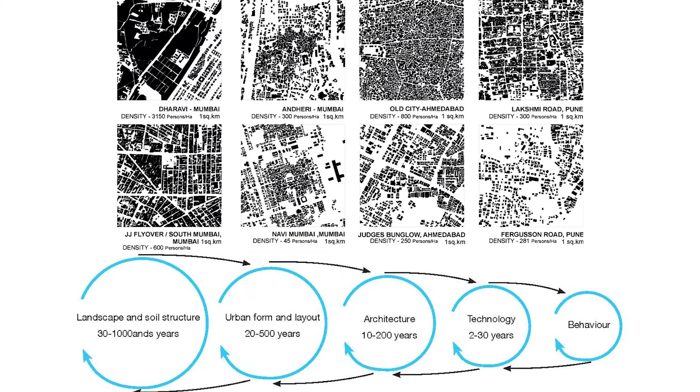So with that, I come to things which I think are important in our cities. If you see, these are like traces of any city, whether you take Mumbai, Ahmedabad, Pune. There is the old city of Ahmedabad, which is a density of 800 persons per hectare, 450 years old now. 1 square kilometer if you look at the kind of built mass and the porosity within it. Then you come to a place called Judge's Bungalow, closer to the western part of the city, and it comes down to 250 persons per hectare, and the buildings are 12 and 15 stories, yet the density is going down.

So I used to always wonder how come in 3 stories you could achieve that density which you can't out here. Yes, it's a little overcrowded, there are larger spaces, scale of spaces aren't there. But what's wrong with us? How come 3 stories and 15 stories don't match?

And then you come to Prahlad Nagar, and there's only 180 persons per hectare, and then you have these bungalows and things like that. So these are questions that have fascinated me: how cities grow, change, add. What is the typologies that you pick up? What is it that happens? And the same with Mumbai or Pune. I'm sure some of you are very familiar with that.

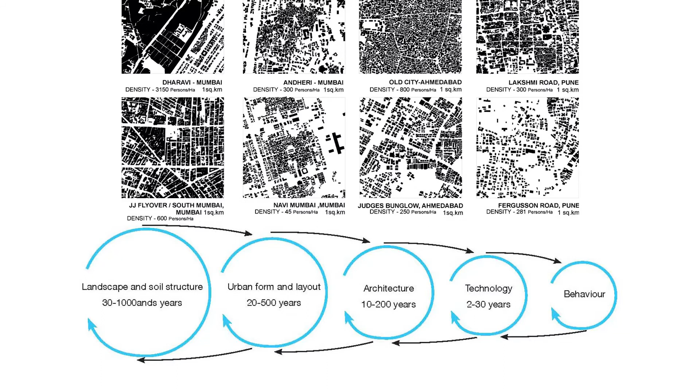The key in all of this is landscape and soil, and as Julio mentioned very importantly, water. These are issues that are connected to the ground, and those have been shaped over thousands of years. They're not something you can change easily. You have to start looking at what's beneath the ground, what's the kind of soil, what sits on top of it, how do you collect surface water, underground aquifers, etc. All of that is fixed in our lifetimes for sure.

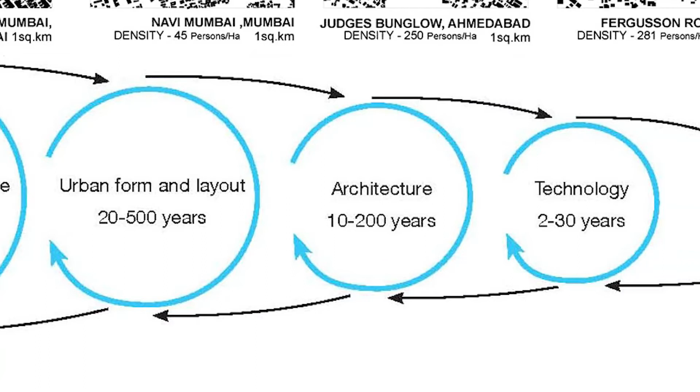You look at urban forms and layout and you say, well, that's changeable every 500 years or so. Cities will renew themselves, they will change and grow. And when you come to architecture, well, 50 years it'll change, 200 years for sure it'll change. What was 2 stories will become 6 or 8 stories, and that will keep changing depending on the land pressures or things, or the city would have moved out from there.

And then when you look at technology, like this mobile phone, every 6 months it's changing. So it's quite easy to change technology. And today when we talk about smart cities, we talk about sensors and things, it never talks about people, or whether people should be smart or dumb. It talks about sensors, and sensor technology is changing all the time, artificial intelligence is changing all the time. So that's fairly easy to change and adapt.

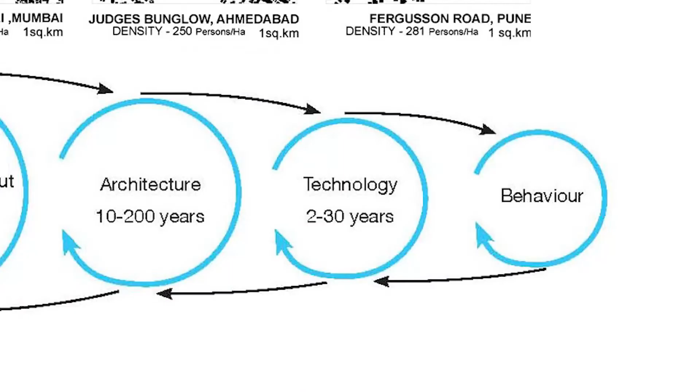And then you come to behavior. Human behavior, we are very adaptable, we adapt to any situation. That's the easiest thing to change. Our mindsets may not change, but behavior can certainly change. So I think when we start thinking about cities, we really need to start looking at what has to be guaranteed for generations to come, what has to be done for the next couple of 50 years or 100 years, and then come down to what can be easily changed, and as we go along, we'll change those.

I'm going to give you 2 examples from the city of Ahmedabad, because I live in Ahmedabad and I'm engaged with the city. It's one of the fastest growing cities in the world. That's a growing city. But what happens when you come to growth?

We have reached in just 10 years from 6.4 to 8.8 million, and by 2031, we're expecting 10.8 million. So, on one side that looks very exciting. You have pollution - it's terrible if you look at it. You have flooding - cities that earlier didn't flood, now flood. You have issues of parking, issues of exclusion, and most importantly, living quality. That's basically what one starts looking at.

Several years ago, one of my thesis students did a thesis on a mechanism we have called the town planning scheme, or land pooling, as it's commonly called, in Gujarat. It's very successful. As the city grows and more villages come into the fold, people, instead of paying cash for infrastructure, have to surrender 40% of their land. It started with 25%, now it's gone to 40%, and 60% of the land is retained with them in their original plot. That 40% is used for infrastructure - roads, hospitals, schools, some for sale, for making money, for paying for all of these things. It's an accepted mechanism because there's no money exchange.

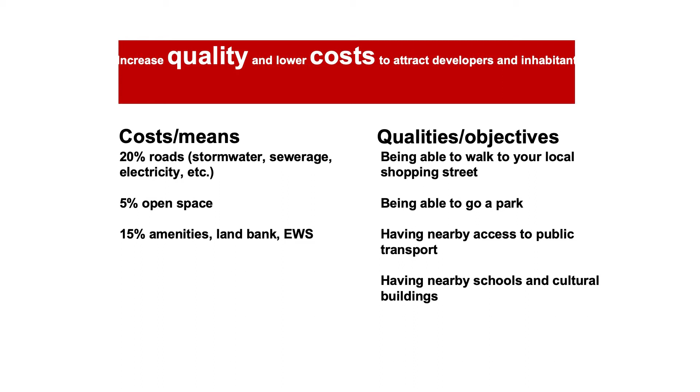What we started looking at was not the cost and means, but the qualities and objectives we wanted to achieve, which was being able to walk to your local shopping street, being able to go to a park, having nearby access to public transport, having nearby schools and cultural buildings. This became the basis of looking at how villages were incorporated. So this is Ahmedabad in the center.

Now, when you start looking at this land, you see that village life centers around the pond. None of these are natural ponds; they're all man-made. For agriculture, you need water. You look at the slopes of the land, you make bunds out there. And as Julio mentioned in the morning, fields give you clues to how water is percolated in, collected together, and used as a collective effort.

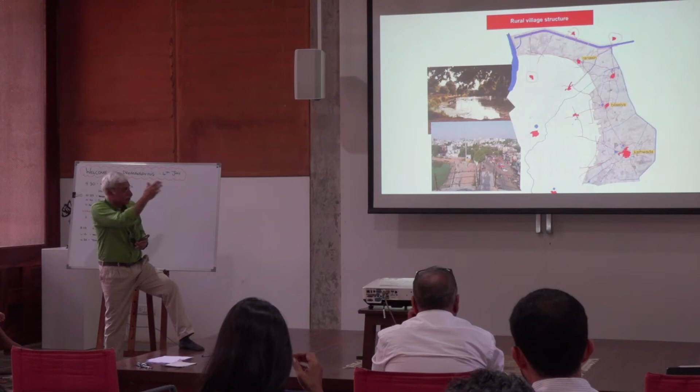And there are also then the public spaces that arise naturally out here, whereas the village chopal sits out there, the banyan tree and the water body—these are all interconnected.

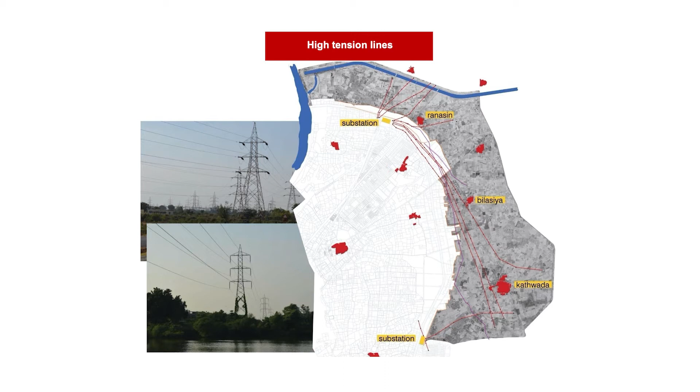Another thing you find is this ubiquitous high-tension lines that cut through our landscape. And when you start looking at them, you can't build under there, but you can use them for open spaces and connections.

And then you look at irrigation canals, lakes, local water bodies, and these are also part of the landscape. If you start looking at them as assets rather than as something to be discarded, then I think you save a lot on infrastructure.

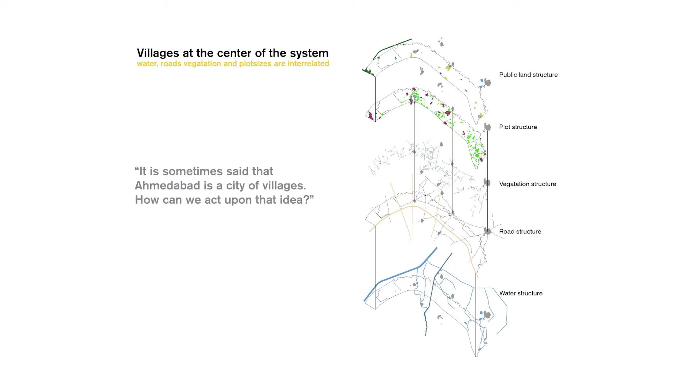So what we started looking at was public land structure—the plot structure, the vegetation structure, the road structure, and the water structure—as layers which connect together one on top of the other. The moment you put them together, you get a plan.

And that starts changing from rural plot structures—very interestingly, and I'll come to the next project—where we found about 1 hectare to about 1 acre or so is the largest, most common rural land holding.

If you look at this and start looking at the urban block, a sensible urban block is about that size. Not only that, but the trees planted on the embankments then become part of your road structure and the side trees for this.

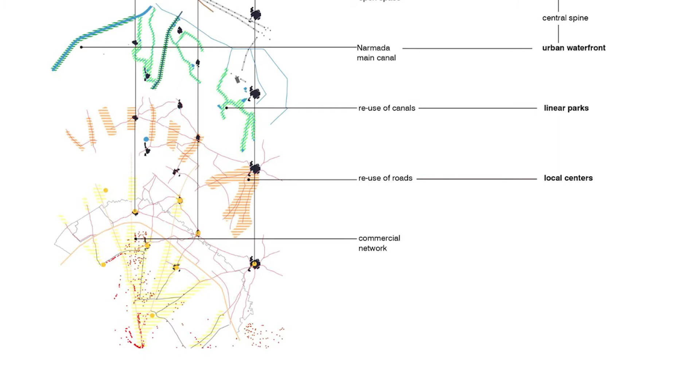So you can combine all of this, and all of this can be used—the canals can be used, the Narmada main canal that passes by, mandatory open spaces can be under those high tension lines till they disappear. And the reuse of existing routes and roads can all be made together to connect up this new structure that's coming into place, rather than as something added fresh.

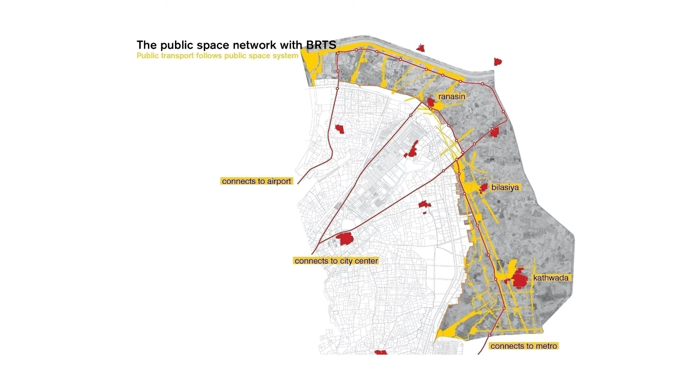So that's this thing, and you can see the yellows—that's all the connections. Ultimately, cities are about connections—connections between your movement and pleasant spaces, through public spaces, through places where you can gather, from places next to water bodies, to trees, etc.

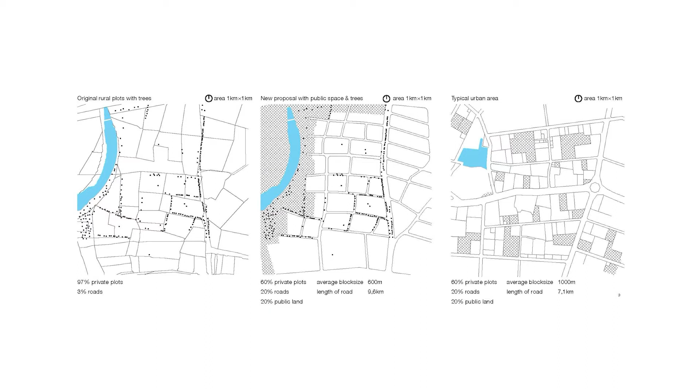Now, this drawing shows you what the town planning scheme generally does. It has one major arterial road, then very small little things, and then little plots of open spaces dispersed in between, because there's a certain percentage of open space you have to work with.

Instead of that, if you concentrate along the water body and put all your open spaces around that, and then use all the plot divisions as they are here to make these roads with the trees, then you've preserved that whole thing, and you've got urban blocks of a certain size and scale that work with the city. And then, as I told you about the relationship, we mapped all the villages in the surrounding areas and their relationship to water and to the public space in between, which was the critical thing as such.

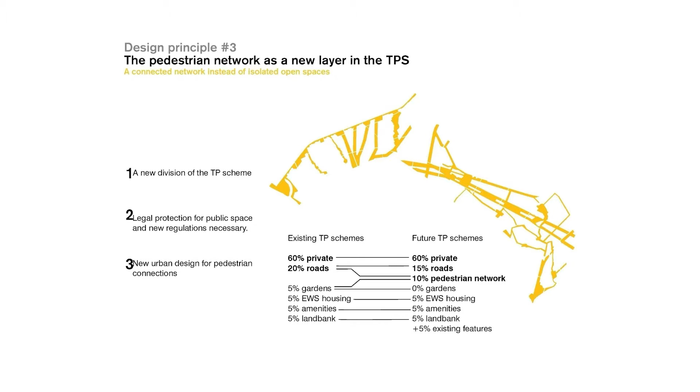From what we came to was that 20% used for roads, we said 15% is actually roads. Even though the total connectivity will increase, the percentage of roads will actually decrease in the land you use. Your pedestrian network and gardens become part of that, so you have linear parks, linear connections, connecting everything together, while all other things remain the same. The municipal authorities said yes, this is a great idea, because they weren't losing any revenues, and they were actually saving on infrastructure.

That's how the plan emerged. And actually you see that the field layouts are very much like urban blocks, not very different from that.

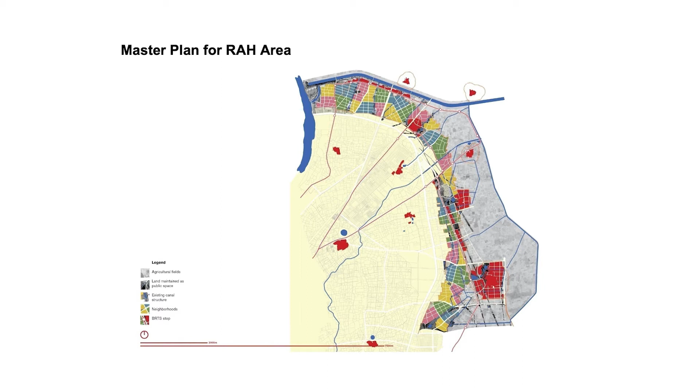Then some visualization of how canals could be reused, public spaces, the streets connecting to them, could be connected together. The larger open spaces would have the taller buildings, and the rest would take their time to grow. So you get a definition of a city starting from public spaces and streets connecting up, and slowly the land fills up, because it's not going to happen in 2 or 5 years, it's going to take 50 years.

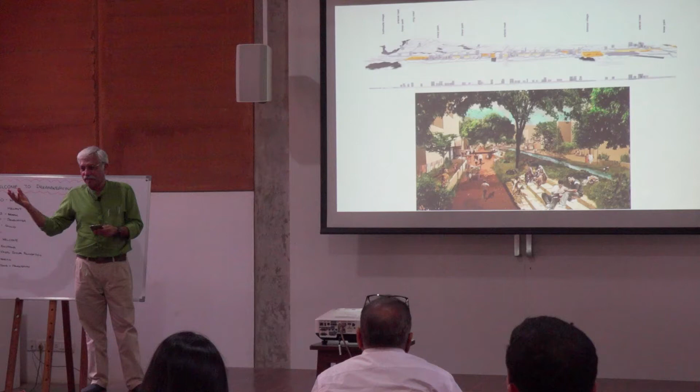The other project I wanted to quickly go over is this stretch you see from east to west, if north is up. There's an 18-kilometer long metro line that is almost complete now in Ahmedabad. In fact, it passes in front of our office. Huge infrastructure that's coming up.

Now the question is that we are very good at putting up metro lines, large projects like this. Every city thinks this is the flavor of the season, and they want metro lines. Whether it connects up anything or not is a different matter. Secondly, most importantly, as we discovered, the last mile connectivity is key for any such project to be a success. If you can't walk to the metro line, then I think you lost the game.

You'll have this metro running empty, not making any money at all, and slowly they'll say this is not successful. You'll also find that if it takes more than, say, 400 to 600 meters of walking distance, people won't walk. If they have to take their scooter, find parking, and then take the metro, it's not going to work. They'll just drive the 6 kilometers they would have gone in the metro.

So we said here's a chance to subvert the system to make a pedestrian-friendly city. Ahmedabad has hardly any sidewalks, and we said here's a chance to make large sidewalks, allow last mile connectivity, and break through the housing societies that they were. So I'll give you an example, this is just in front, close to our office.

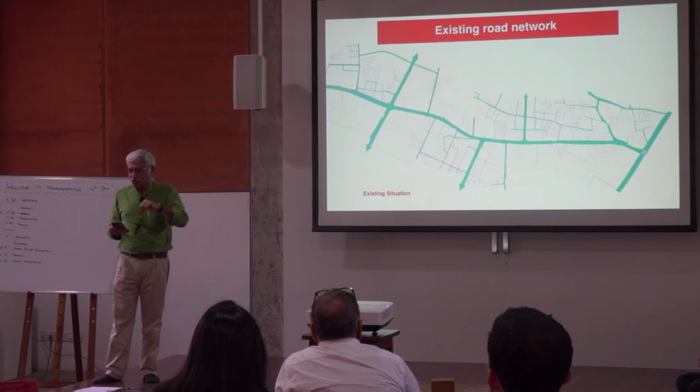They said, okay, here's a large parcel, then they'd give it to developers to develop it, and you'd get gated societies. What we found very interesting was that people would break the compound walls to take a shortcut, and some of them had started allowing that. So we said, why don't we use that as a method and start looking at margins?

We waste about 28 to 34% of our land locked up in margins in buildings in our cities, and it is completely useless. If you start quantifying it in terms of money, I think it's a huge amount. There was recently a report in the Times of India for Ahmedabad, a CEPT study done that showed how much land you're wasting in your cities.

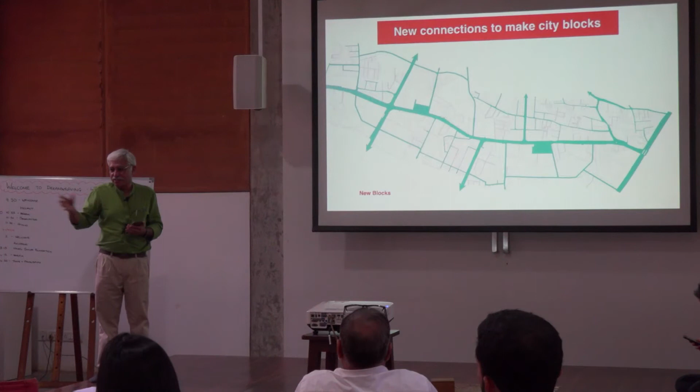That's why I come back to what I showed you in the beginning, which was that the density in the old city is so much higher, still being 3 floors, whereas in the new city, it's all locked up into these margins. So we started looking at that and the common plots.

We started discovering so many ways you could take private and public lands, connect them together, and have shortcuts making this. Now you start getting the sense of an urban block within that, and then in those places you start putting in public utilities, public amenities, to connect the city. From that emerges concentrations of public spaces with large housing, this remaining untouched. It will change as it changes.

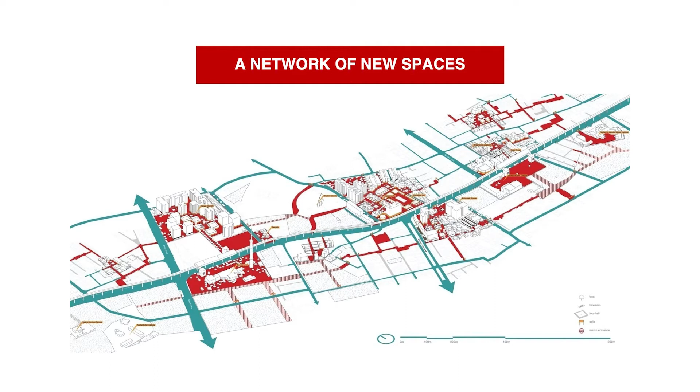So the whole point was how do you carve out of what exists and see very carefully what you can install inside that to make it public friendly and more porous and permeable.

Now I'll come to a competition that we took part in, which we never won. Richard Rogers, who passed away recently, was one of our competitors, along with Fumihiko Maki and us, participating in this Amaravati project. We put a lot of the ideas we were talking about into this, and I thought I should share this with you.

It was part of a larger master plan of about 217 square kilometers, and we were asked to work on the capital complex of 4 square kilometers within that. That's just about a little short of your city area, which is about 4.9 square kilometers, and this was about 4.

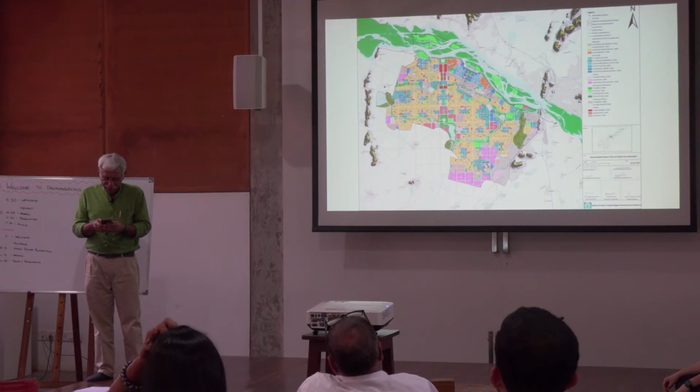You see that little strip stretching from this major highway coming in here to the Krishna River on the other side. The Krishna River floods, so there's a huge bund, so actually you have no access to the river. There's a huge bund that cuts it off.

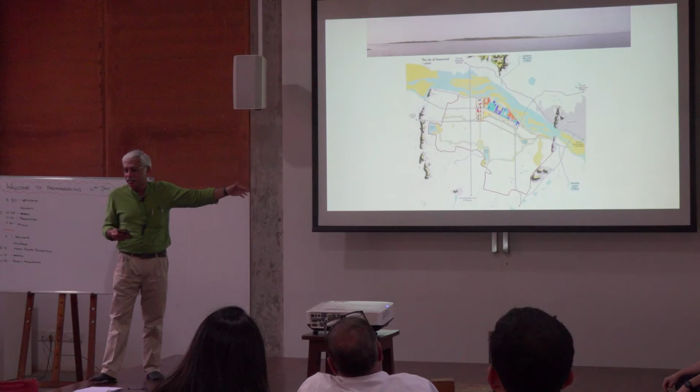So the challenge was, how do you connect to the river without allowing the flooding? In fact, you have another problem from the hills—the water flows in towards the center and then comes out, and you have to discharge that water. So there were conflicts in the ways the topography worked. That's the Krishna River on top—you can see how large it is.

So we looked at three things: the sacred, the land, and the people. The sacred, I think, is important to anchor people to where they belong. The land tells you about the topography, the soils, the species of things that grow on it and that thrive on it—it's mostly agricultural land. And then, of course, the people and their culture.

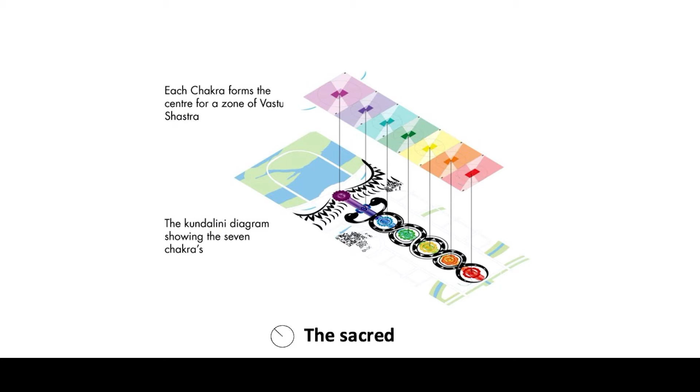So we looked at these three things and asked, how do we represent that in a plan? For the sacred, if you look at this stretch of land, we used a diagram like a Kundalini diagram showing the 7 chakras, dividing up the spaces. Each of these formed a Vastu zone, because this is Telangana, Andhra Pradesh, and Vastu is very important.

So it was part of the brief. We'll come to the question of how much I actually believe in that later on. But we did this zoning, and we had a Vastu person as part of our team to do this.

From that, the idea was that the principal buildings—there were three: the Secretariat, the Assembly, and the High Court—formed the entire complex. Then there was housing in between, and government offices. This was essentially a government sector as such, and those would stretch in between.

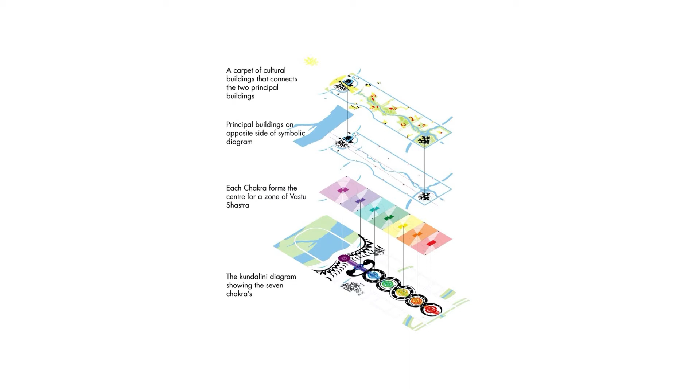A carpet of cultural buildings were interspersed in between, connecting these two principal anchors. These were various kinds of museums, art galleries, etc., that came up. So this was the sacred part.

Then there were all these existing bunds, and sight lines, and connections through that—canals running through—and we said, how do we incorporate that? We started connecting existing trees and plantation on site. I know it's not very clear, but bear with me.

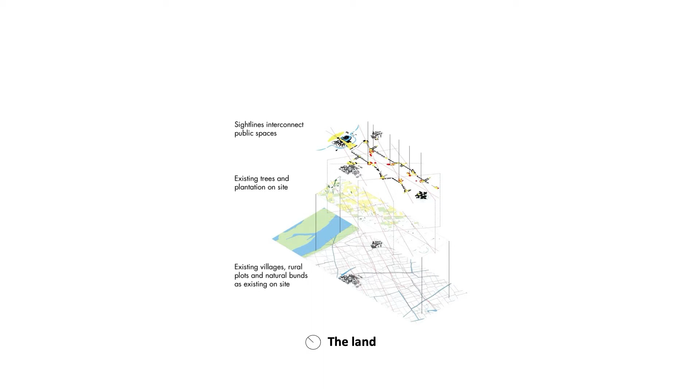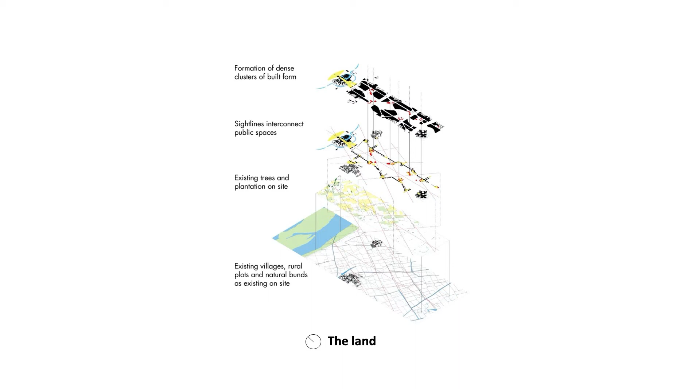These public spaces that we interspersed were connected through various sight lines and shortcuts, making a crisscross pattern of connections. Around those, anchored around that, were dense clusters of built form surrounding each one. Then they were made more porous to get the kind of numbers we were looking at to fit into this—that was the usage of the land.

The third part, the people, involved 6 clusters—there were 2 villages adjoining us, and 6 clusters of local schools and facilities, which were again where these cultural buildings were happening. They were clustered around that so they would be useful not only during certain specific hours but could be used 24/7 by other facilities also, with residential programs so each one had easy walking access within 5 minutes to any of these facilities.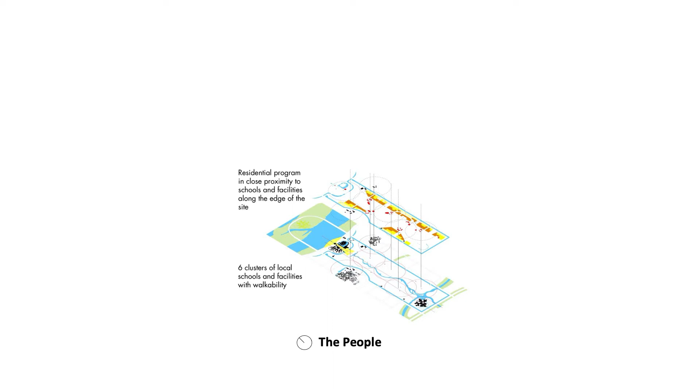Office programs faced the central open spaces, mostly government offices, with a system of interlinking bazaar streets tying the whole thing together. Then there was an inside public bus loop interlinked with the bazaars, the streets, and the public nodes, as well as water-based movement through that, etc. So this is what really formed the basis of the plan.

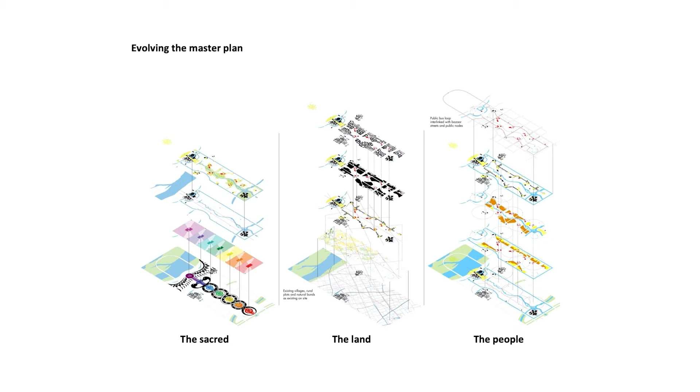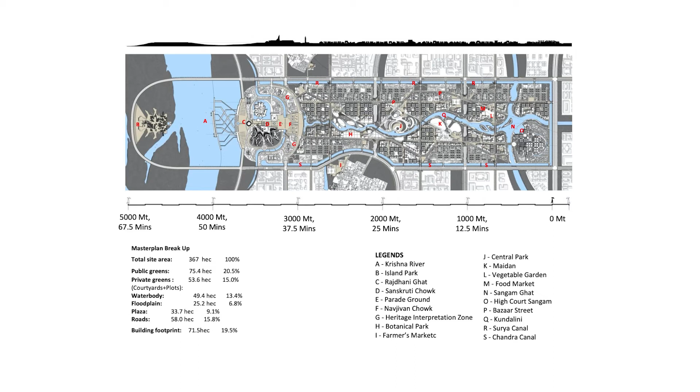And that's how the plan sort of emerged, that connecting to the Krishna River, the main public spaces, the main things for the assembly and the secretariat on one side, and the high court on the other side, and the office spaces and housing areas connected in between.

Now, what were our concerns when we were looking at this? One was health and safety, movement efficiency. We all know that people walking is the most efficient form of non-polluting transport, then cycles, public transport, and last and least is cars.

And of course, pollution, because the moment you take away this traffic, pollution levels start coming down. And the other one was mixed use. So how do you reduce walking distances? How do you make inclusive societies, with flexible infill and engaging a program.

And so if you see the standards for each of these, whether they're cultural buildings - that's the red one - standards for walkability. What we achieved in Amaravati was far more efficient in terms of walkability, much closer, densely packed.

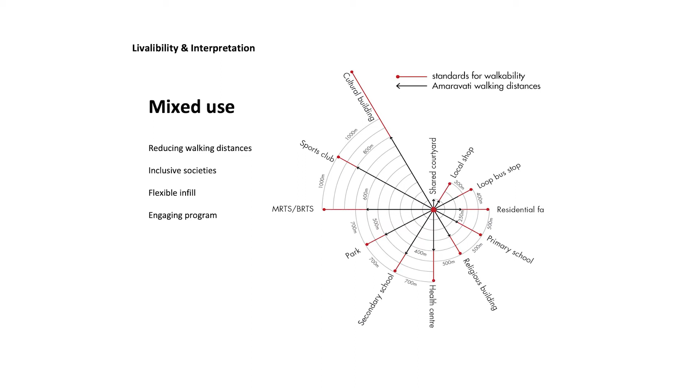And so the built form came together like this, that through your bazaar street, which is this part of it, you have offices, cultural buildings, dense housing, and then slowly more private bungalows. As you went to the periphery, the bungalows came in.

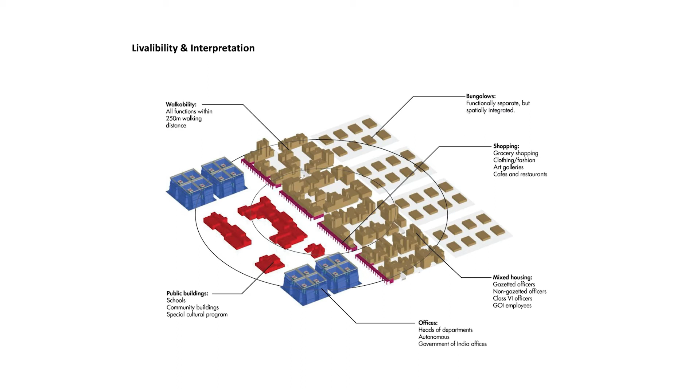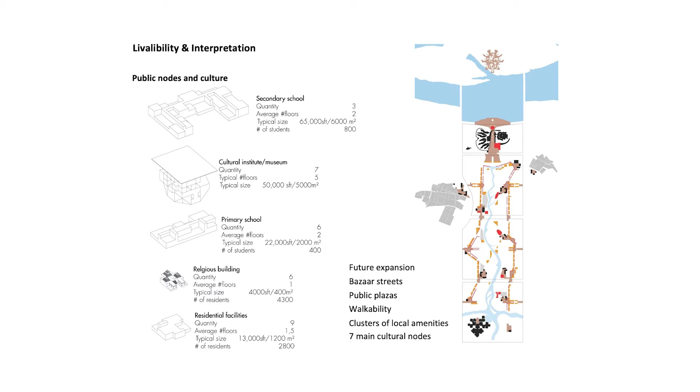So public nodes and culture, as I mentioned, cluster of local amenities along with that, 5 minutes walking distance, public plazas connecting them, bazaar streets connecting it, and then of course future expansion within that.

Walkable cities meant confining cars, active street life, defined streets and urban spaces, generous sidewalks, limiting building heights, and pleasant microclimate. These were the criteria that we put up.

The question of thinking about density - very often that's the model one in the center. If you took a look at FSI2, you need that much parking and you get a tower, and you get this sort of island around the thing of cars. If you look at setbacks, then you're still covered with cars.

And what we were looking at is mixed use and parking all happening underground. Now, we are not talking about a completely car-free city, but we try to confine cars to a certain area, and I'll show you in this.

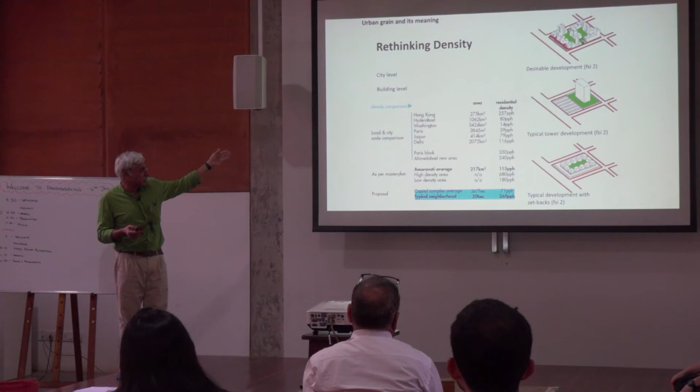And then the kind of densities you achieve compared to, say, Hong Kong or Hyderabad or Washington - these are figures that you looked at for urban blocks. What is the size of walkable distances? We are all aware that finally everything has to be scaled to human walking distances, because the moment you exceed that, you need something to drive in, something to carry you through.

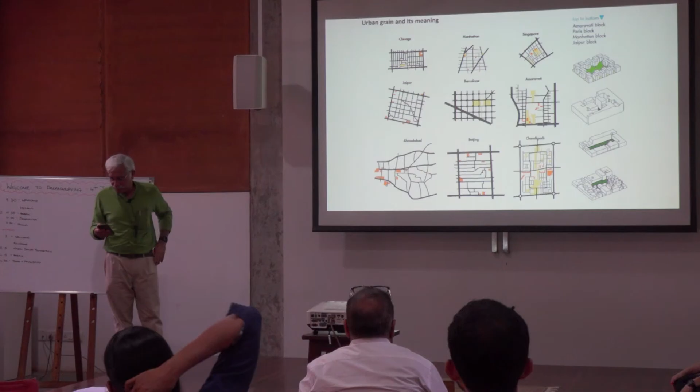So I'll just quickly go through this. This is the housing and the rest of it, and that shows you what sort of came about as a model.

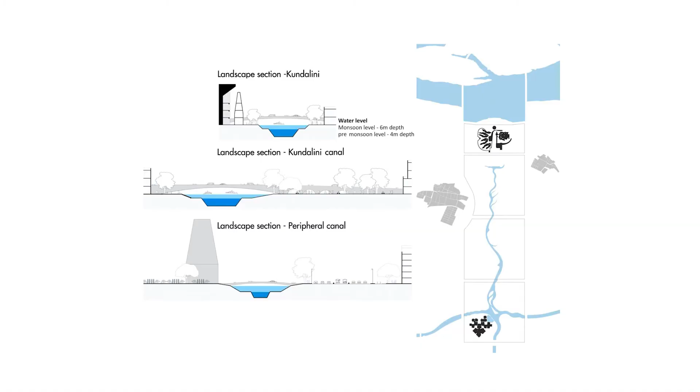And then, of course, there was the landscape. So we had to take care of water as retention ponds. So instead of doing one retention pond, there's a series of connected water networks that take you through, and that also becomes a mobility corridor for slow-moving boats to go through it.

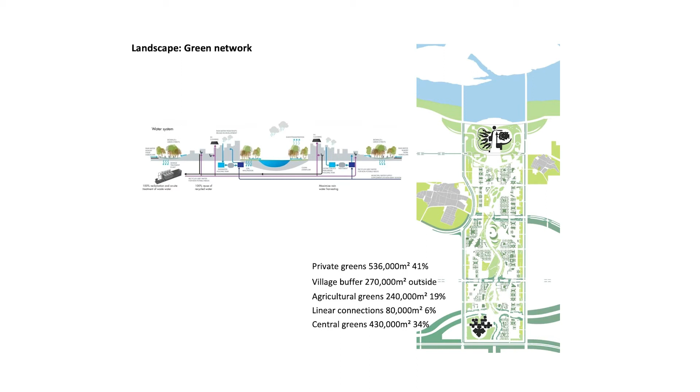We also get reflective pools, peripheral canals, and then the central greens to linear connections, and then finally to village buffers and agriculture. And we looked at productive agriculture as part of the plan, not something that you have only trees and forests - you also have productive agriculture as part of the entire plan.

And from that came also the private greens, and so you get a very large percentage of green in the plan.

And then the different types of roads, connections through bazaars and basement parking for the streets, so that they're limited to this bazaar street and the rest of the parking actually goes underground.

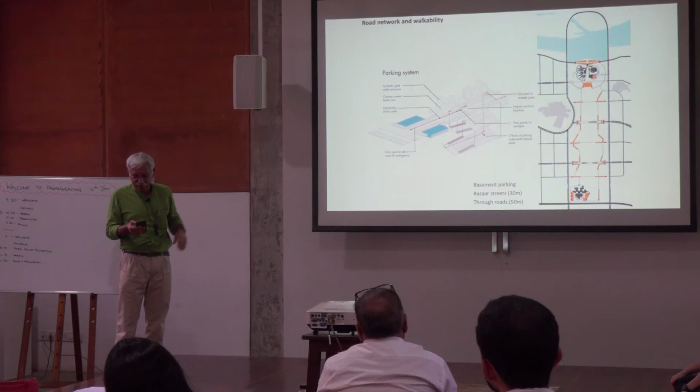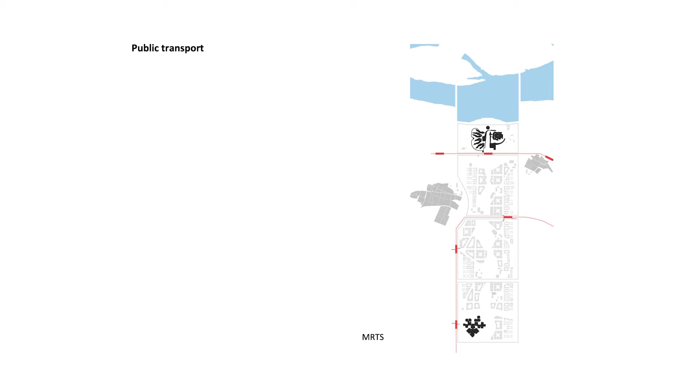And of course, not only cycle tracks along the streets, but also within the green spaces. And then there's the citywide network of MRTS, the metro rail, as well as the bus transport, and a loop bus that went around this, 4 kilometers in length.

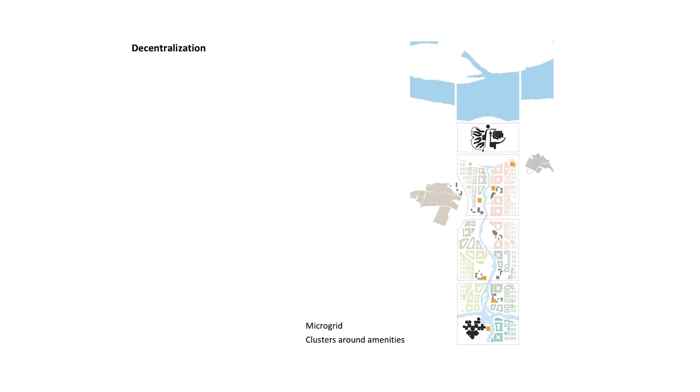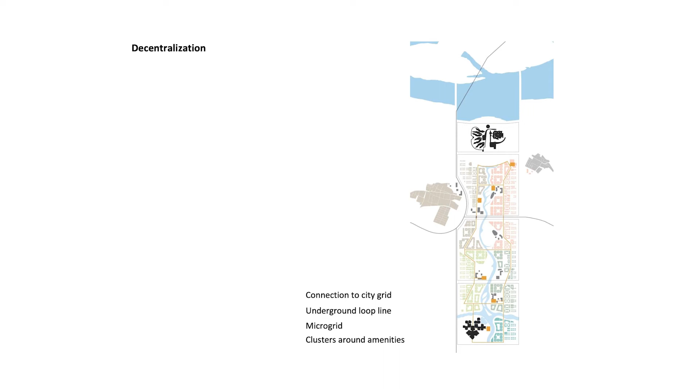Then the question of energy, and the energy thing was we were looking at localized infrastructure. So we looked at a certain population threshold of about 20 to 25,000 people in each cluster, asking what are the energy needs and how can you treat for water. Connected through air conditioning, as well as providing electricity at a local level by using the waste generated by the town, as well as using rural waste as gasifiers to run the electricity grid. So instead of thermal power, we were saying natural gas and solar PV was the way to go eventually.

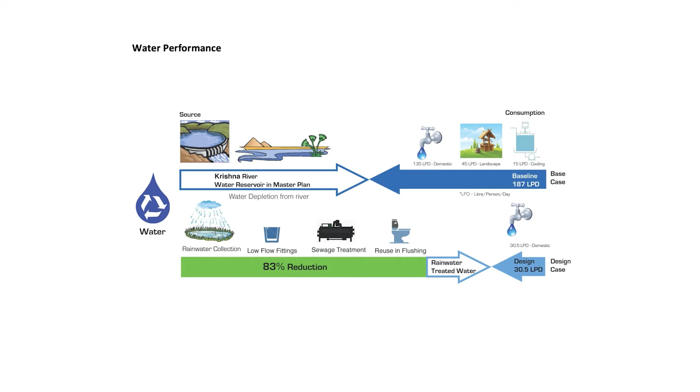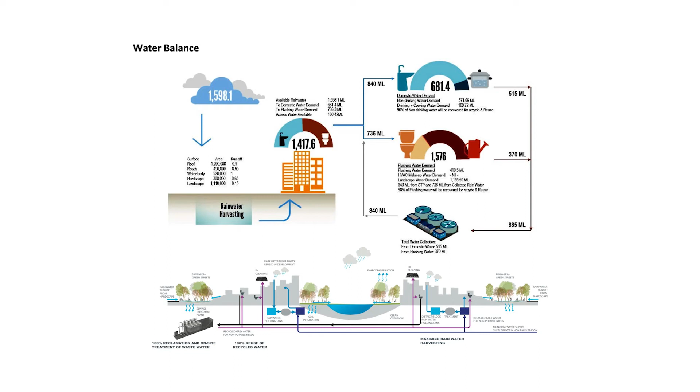And these were connected to water reduction too - how do you collect rainwater, low flow. I have calculations for all of this, and I think these are common things, but to put them into one project is, I think, the important part. Same with solid waste, and cooling - what kinds of turbines etc. we could combine. These are all worked out, along with a water balance of rainfall, rainwater harvesting from different surfaces, different levels of treatment for each, connected to reuse of wastewater as a complete grid.

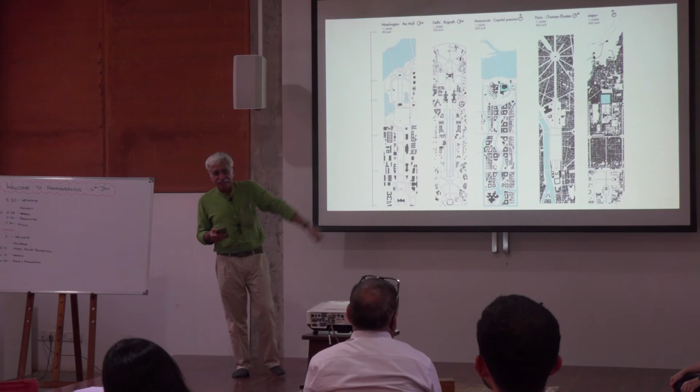This gives you a comparison of the Amaravati Capital Precinct to the Central Vista being done in Delhi, the Washington Mall, Paris and the Champs-Élysées, and of course the Jaipur Old City - just a comparison of densities and open spaces.

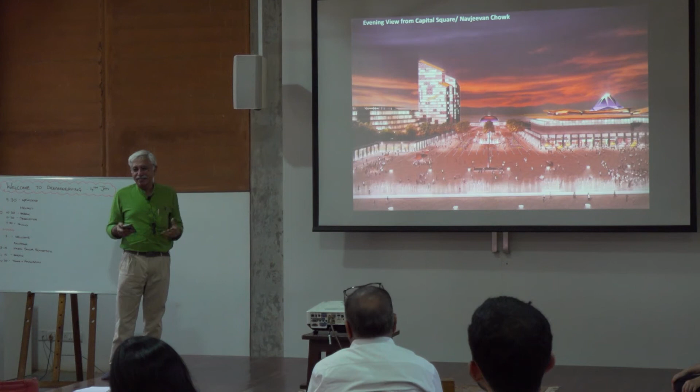So these are some images which give you a sense of the city - parks and gardens within the city with the built form connected, flowing into each other, not isolated little pockets but flowing together. I think that's the important part I'm trying to make. And even when you talk about administration, you talk about places of protest and revolt in between, so there is space for everybody and every opinion.

The last thing is Nalanda University, which we are in the process of completing, about 455 acres. But there we are actually implementing all of this - whether it's water or energy, all of these can be done, and at scales which are fairly large and can be upscaled easily.

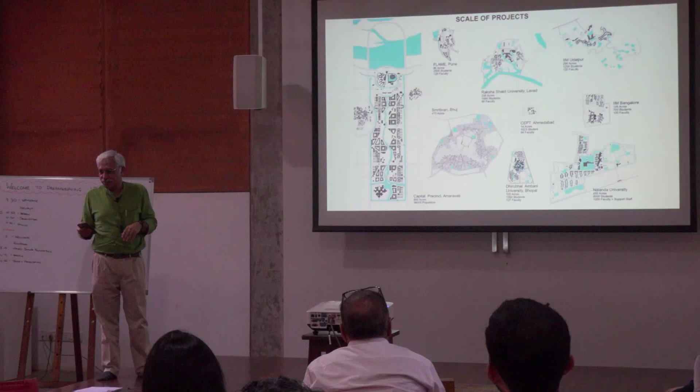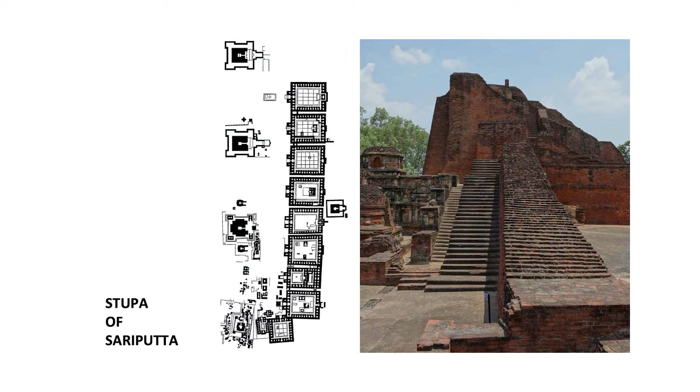This, I'm sure you're all familiar with, or if not, you've visited this place. This was the inspiration for the kind of architecture that manifested itself. But I don't think it's about the architecture - it's about the fact that ruins allow you this latitude to imagine any possibility, and each one has their own way of looking at ruins, finding their own little way of connecting to what is there.

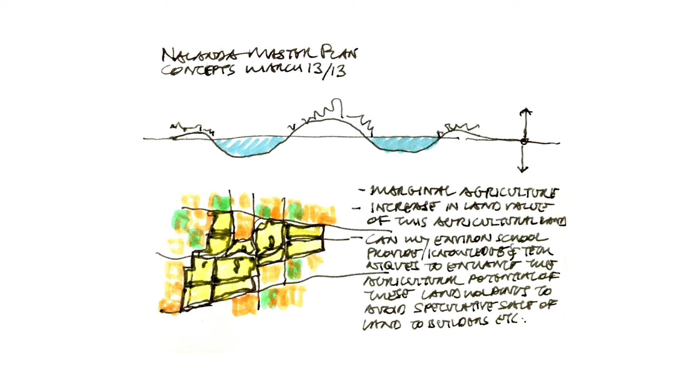So when we started, we had this strange piece of land - I'll show that more clearly afterwards. The other thing is this area gets a lot of rainfall and is absolutely flatland, so it floods. The general way, if you look at traditional villages, you excavate the earth, make a pond to collect water for the rest of the year, and mound the earth so you're protected from floods. So you get this diagram of how to build. That water is not only useful for you, but also has fish in it and other things produced, becoming part of your life cycle and culture.

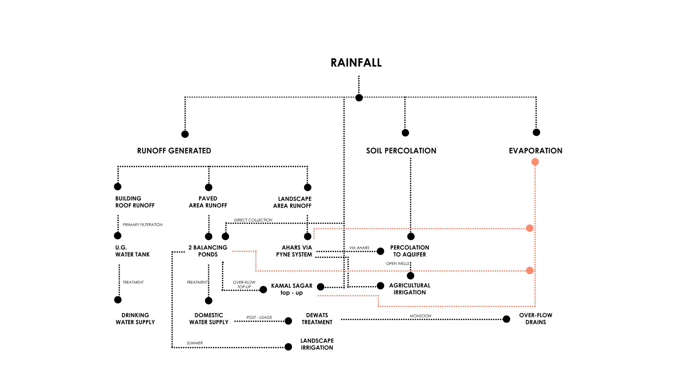The old city of Ahmedabad has a collection of tanks under each house where the roof water is collected every season. It used to be used regularly, now less so because there is water on tap, but earlier they depended on that, and so they had to maintain it because it was your water you were going to be collecting. You had to maintain that roof, and before the monsoon you cleaned it up. Not only that, but the streets - because the water would first go into the tanks, which were emptied by that time, and it would take a while for those tanks to fill up. So you never had any floods on the streets because you were not releasing that water immediately on the streets. And the streets, if you see those winding paths, are actual water courses or water channels, so that's why they meandered around.

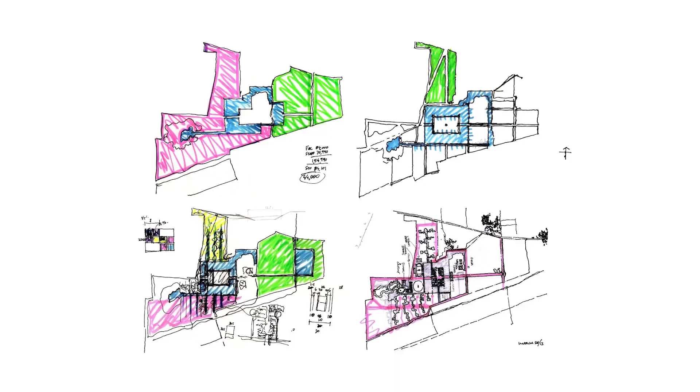So these were lessons that we said, how do we do that? All our roof water is being collected in separate tanks and being treated. Water runoff from the plazas is collected separately, and it's actually similar in some ways to the ahar and pyne system in Bihar, how they do agriculture. So we take ancient wisdom, put it together in contemporary ways, and from that started emerging a plan of how this place could be the focus of this and the water bodies and the connection. Slowly it came to be like our ancient temple tanks, etc. There is a tank in the center, things move around it, and the water levels change over seasons.

They're collected together, and important public buildings happen around it. So in 455 acres, we said a 10-minute walking distance from the center to the side is what we should aim for - so how compact can you make it, how dense can you make it. And so that's how the walkability part came.

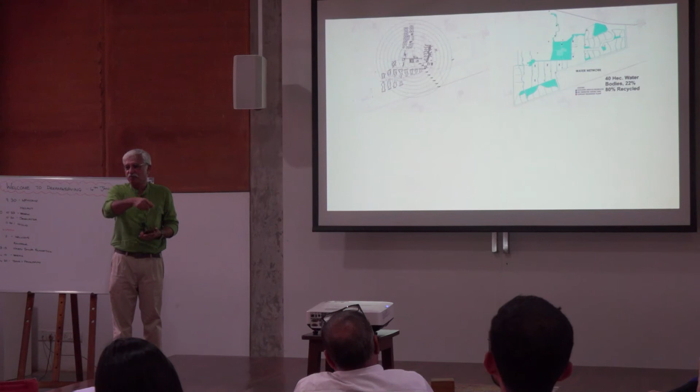Then was the water network. So what we finally did was to stop rainwater flooding. We have these holding tanks in two parts and large agricultural holdings which can get flooded in a severe storm, but they also give us the resiliency that when there is a drought, we have excess water. We use that water to go into the main tank, and that's the water then we consume, so that people are aware that this symbolic tank is also something you have to take care of, otherwise you'll be polluting your own tank. So that became the focus of the university.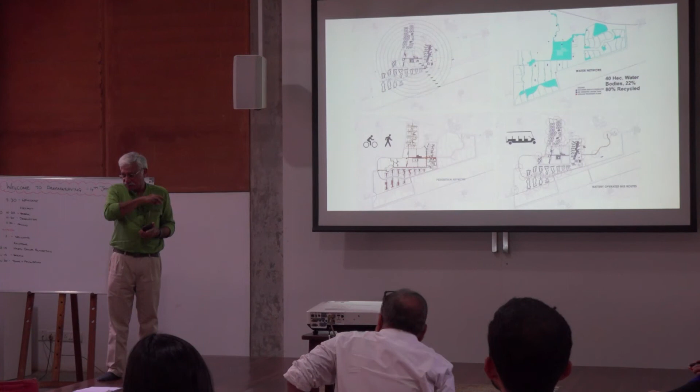And then, of course, if there are waterways, you should have pedestrian networks, and you have green networks around that. Eventually, of course, you need motorized transport too, so you have battery-operated golf cart-like buses. All parking happens on the periphery - you come and change, you don't drive in your cars. In the beginning, right now when they've started occupying, obviously everything is not in place, so the faculty is going to bring their cars inside. We said okay, we'll make temporary parking, but eventually they will have to also park on the periphery and move out. So you go in stages as densities grow and things change - you keep changing with the times, but you make provisions for that in the beginning.

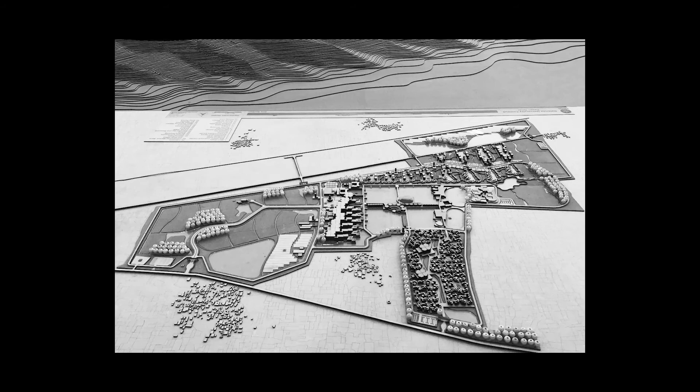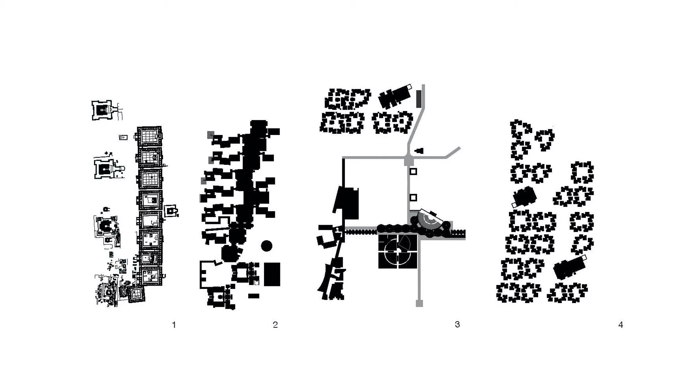And then the distances we looked at was 500 meters to 400 meters. So ancient Nalanda ruins and the sort of cloisters that were there, or the viharas as they're called, and the pathways - all of them in different parts relate to that.

And then most importantly was this, that what you excavate, you build out of that. So we are building, I think, one of the largest constructions of almost 2 crore bricks or compressed earth blocks ever done. It's done mechanically - both main contractors are actually doing this.

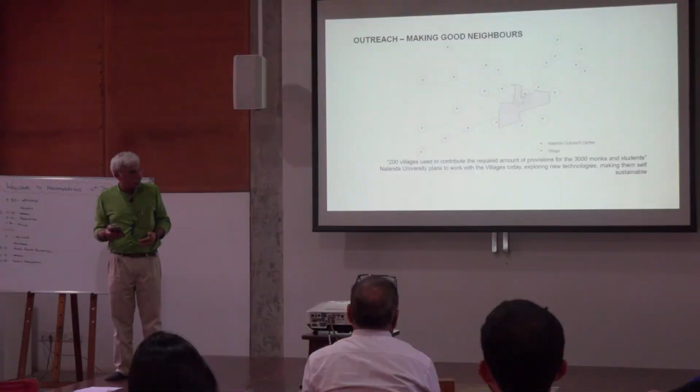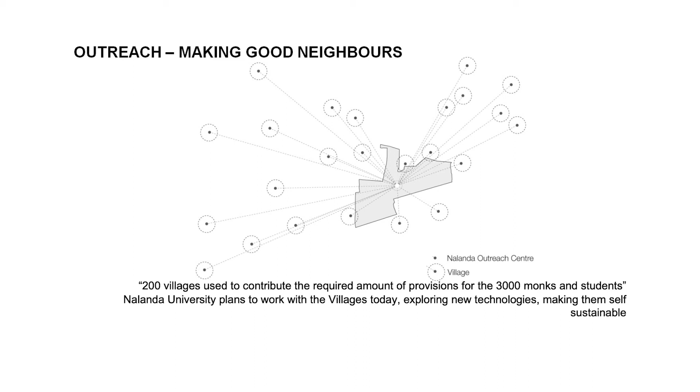The other important thing was that 200 villages used to contribute the required amount of provisions to sustain this ancient Mahavihara, and we said, can we give back? So when we looked at the cycle of resources and a net zero campus, we said if we look at this, you produce power by biomass - whether it's agriculture, crop residues, sewage, municipal solid waste, animal residues, industrial residues, forestry, crops and residues - you get your energy and water from there.

You get some photovoltaics, but in the way we look at cooling, because that consumes 60% of your energy, if you can use that heat exchange, then I think it becomes even more productive. So instead of talking about high tech, we're talking about cow tech. That's what we are trying to achieve. And I think if that works, we have an alternative source of energy. Bihar is power deficient, so even if you say you exchange with the grid, that's not possible.

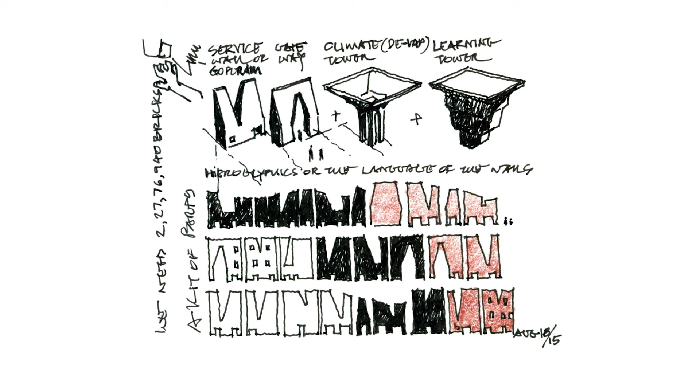We're running out of time, so I'll run through this. These are ancient ruins with serrated edges, and the ruins of our buildings came from that language of buildings — service areas which make the periphery, climate towers that bring in cooling and collect water, and classrooms that mushroom out, which we call learning towers. The walls are made of service buildings which take up different forms, but they all start from the same structure.

There's an advantage to that. The outside temperature cools down, this breaks down the heat, and inside you get about 32 degrees Celsius because it's shaded like a veranda. So you have to go from 32 to 24, not from 45 to 24. So you save on energy.

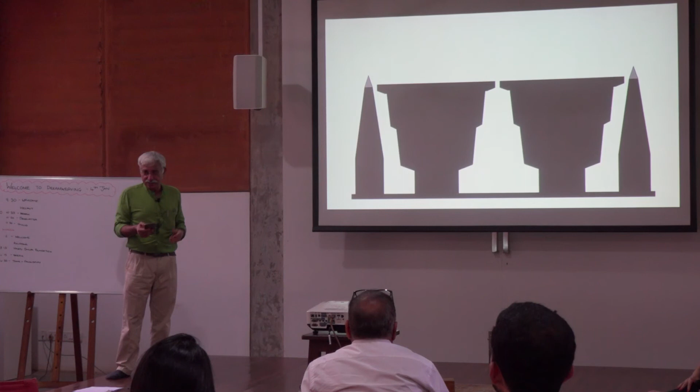That, of course, is symbolic too, because if you look at this, it's like a stupa, or the Buddha in meditation, as the stupa actually is. And from that comes a series of buildings that emerge out of it.

From the model, we came to actual construction. At the first convocation, we gave a brick from the site as a souvenir to the President of India then, and the person standing next to him — that's Professor Amartya Sen, who was the first chancellor. Then construction started.

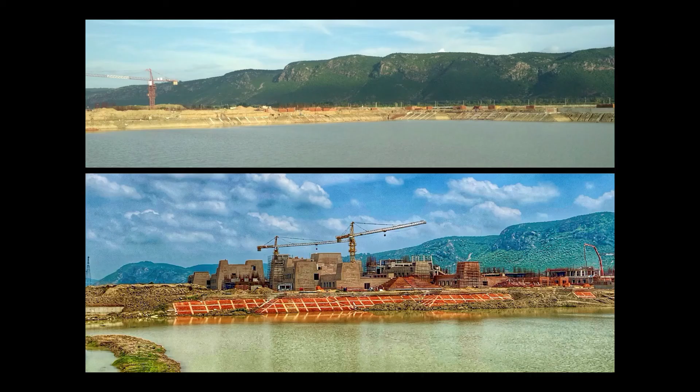What you see is a mixture of burnt brick, which is the red one, and the brown, which is compressed earth block, taken out from these lakes that were made. All our construction water came from that. We have no bore wells — we are not boring any water from the ground, from the aquifer below.

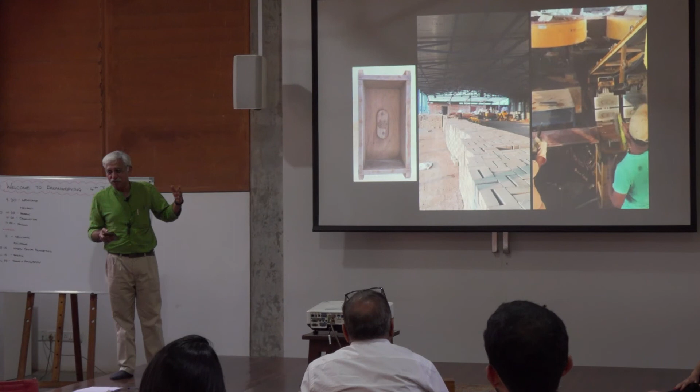That shows the brick-making system. It's automated, tested in all kinds of conditions to make sure it works. And the government is very, very fussy about the way they look at all of this before they approve it.

Okay, this is all about water. We were asked in 2004 to do a memorial for the earthquake victims of Gujarat's earthquake. I'm still working on completing the first part because it's been a very difficult project to complete. The basis was simple: plant one tree for each victim. When we found out the number of actual victims, there were 13,805. It was represented for us — the forest represented rebirth, plurality, adaptation, interdependence, evolution, and transformation, and a celebration of life again. Rather than mourn, we said we should celebrate life and the growth of trees.

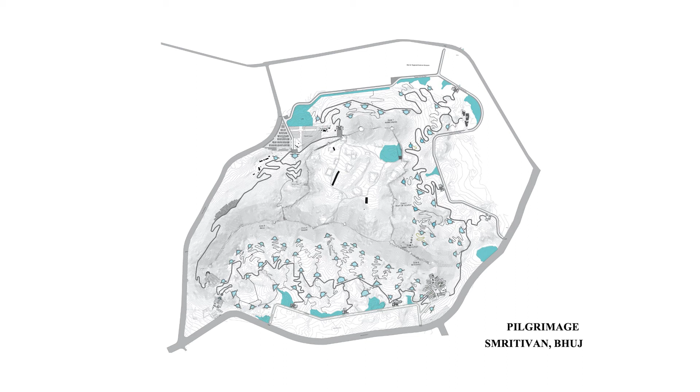So instead of a tank, you had many tanks of different sizes that came and collected water. You could do them over time, phase them out very easily. They were cost effective. They never went over 2 meters, normally about 1.5 meters, so they were cheap to do.

And we decided to do them out of gabions. So you fill local boulders in by local labor, and you make these leaking reservoirs. It collects the water, because otherwise it would just inundate and expose the rock. And we got this.

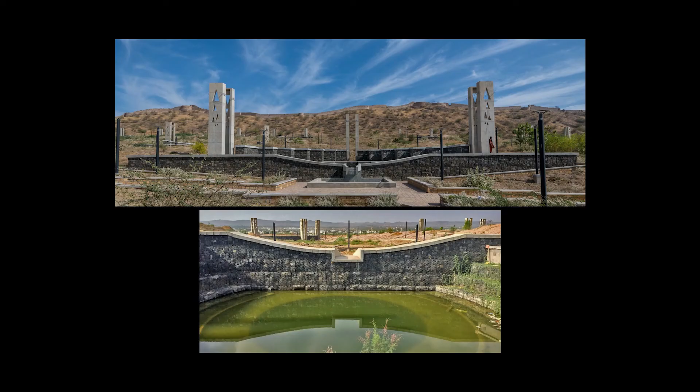And so that's a celebration of coming together collectively. That's what it was when it started. That's when the first rains came. And then for some years, it started slowly.

You can start seeing downstream of each one, as the water goes in, the plants start taking root. Now that's what we are looking at. You can see those reservoirs in between, and you can see how the hill is still barren.

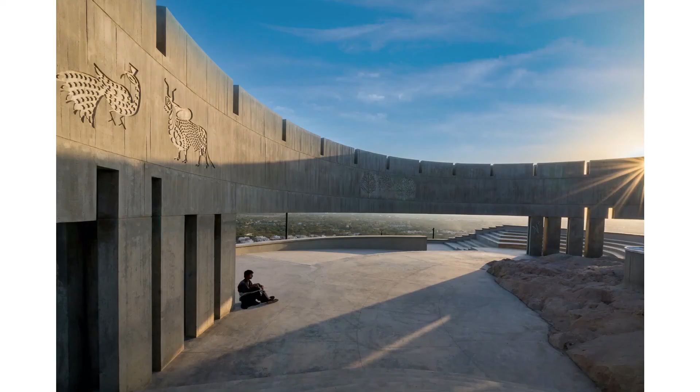And then one part of it is the sun point, and so I end with this picture. Thank you. All right.

Ten minutes for questions. As architects from Auroville, we are supposed to weave our ideas together and submit it to Vastu Shilpa Foundation. So from your point of view, if you could provide us a one-line brief or a design objective which makes perfect sense, that would really help us.

So by the end of these 3 days, I'm sure we'll have more than one line. Let's look for that. I'm searching as much as you are, because I think I'm learning. I don't claim to know enough about the place. I think it's very kind of you to share whatever you have learned over the years from here with us. Hopefully by the end, we'll be able to walk together.

Could you comment a bit about implementation and how you might see implementation in the Auroville context versus perhaps a campus? When you say implementation, of which part, what detail, etc.?

I think it's a much more complex question to be taken up as we go along, but yes, definitely that is going to be the key. What we are aiming for here, all these exercises, is to move towards implementation rather than just talk about things. There's a given time frame within which we would like to do this, and I think we all have to fall in step and move towards that.